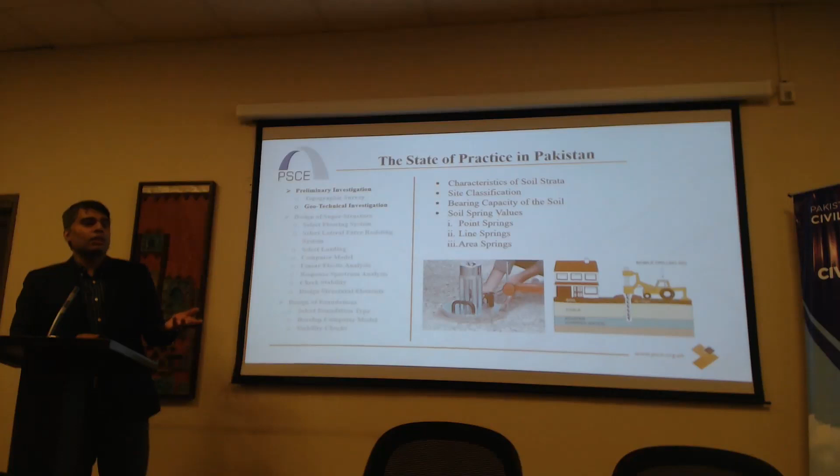Now, it's not as simple as that, because sometimes the geotechnical investigation informs you about the site in a certain way that you might end up saving money by adding a basement, right? Because if your soil is weak, you might spend a lot of money going for the piles, but if you add an additional basement, that will result in additional covered area for the owner, and it will save a lot of cost in terms of piles. So this step seems primarily done to select the type of foundation, but it is not as simple as that.

So after you're done with the geotechnical investigation and the topographic survey, the way I think about it is, we know about the space utility plan of the building from the architect, right? And so we know about the spans, we know about the typical live loading and dead loading and everything. So we tend to think about the flooring system that we will adopt for design of the building. After that, the next step is you start to think about your lateral force resisting system. And Rizwan sir, please correct me if I'm missing a step here.

There are a number of options given in the UBC code, right? So you have this building frame system, then there is a bearing wall system, then there is shear wall, then there are dual systems. And so a typical structural engineer would pick one of the lateral force resisting systems. Now, the consideration here is, you would like to pick a lateral force resisting system that is the most economical, number one, and number two, that is permissible by the code, right? Not all permutations and combinations of the lateral force resisting systems are permissible.

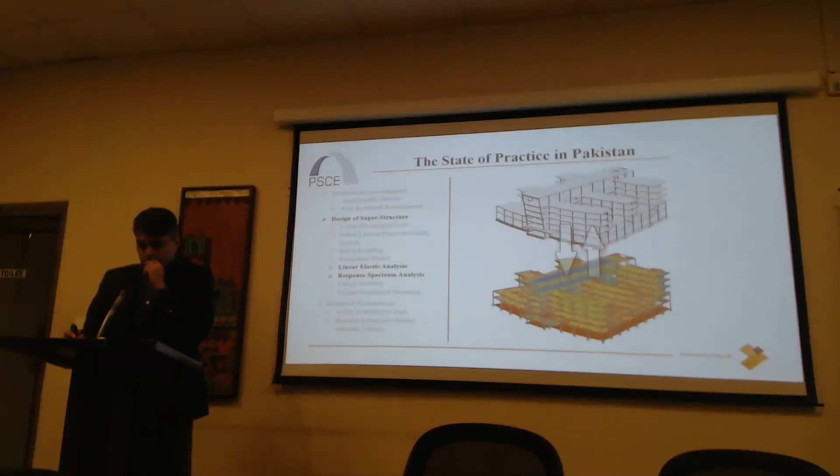And then you undertake linear elastic analysis of the computer model. Now imagine, this is very popular. This whole scheme of things is very popular in Pakistan. The reason being, a kid can get out of a school, have zero experience, and follow this cookbook and design a structure, right? Things seem to be very easy. So it's the method of choice in Pakistan.

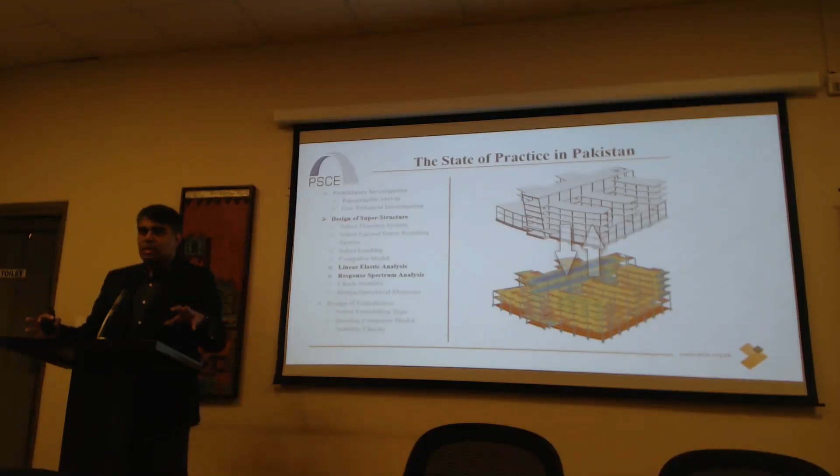You don't have to have any specialized knowledge of structural engineering, or you don't have to have any understanding of seismic hazard risk of various regions. And you just follow the scheme and you get it done. Then I missed something, the stability checks, which basically is you would check whether you have a failure in one of the columns or not, something like that, and then you design all of your members. Right?

So after you're done with the design of the superstructure, you have the geotechnical information, and typically, a structural engineer would know before he starts whether he would go for a raft or a spread footing or an isolated footing. But this design of foundations typically comes later, after you've designed the superstructure. And I might be wrong, so please feel free to correct me. But this is the practice that typically is undertaken in Pakistan, right?

And then you develop a computer model in SAFE, right? That computer model is not connected to the superstructure. So what you do is, ETABS allows you to export all of your forces at the base level, bring it to another software called SAFE. You apply those forces to the SAFE model, and then the deformations are never transferred back to the superstructure. Have you ever thought about it? Because we have been following this practice.

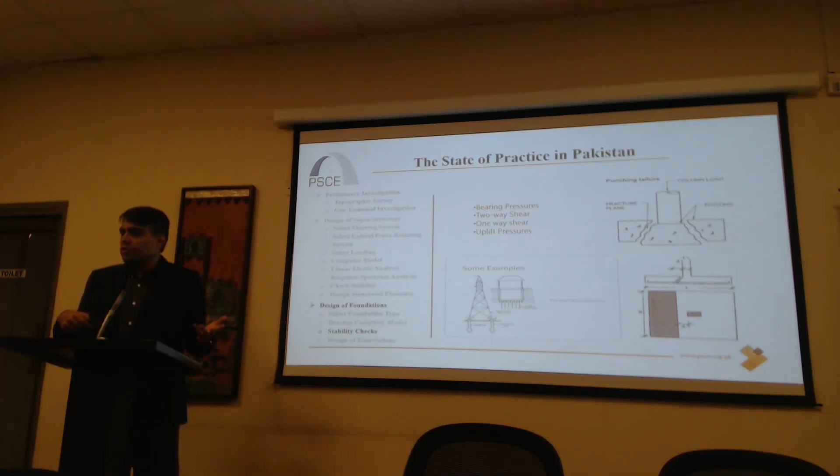And then there are stability checks. You see whether there's a punching shear failure or not, whether you need to thicken the pads or not, and then you would design the foundations. So as the performance-based literature would say, this is a perfect cookbook. Here are a few pointers that I would like you to think about. You are designing for reinforcement, right?

But up to this point, whether you have designed the superstructure or the foundations, did you ever consider stiffness of a column, for example, with 4% axial flexure reinforcement as compared to stiffness of a column with 1% axial flexure reinforcement? No, right? It's very conveniently estimated as BH cube over 12 multiplied by the cracked stiffness modifier that is given in the building code of Pakistan.

And when I thought about it, I was amazed. You know, here we are, the core purposes of any concrete structural design are two: to proportion the size of the elements and to decide about the reinforcement within the elements. The reinforcement is one of the most fundamental parameters of reinforced concrete structures, but yet we never account for those reinforcements when we are proportioning stiffnesses in our finite element model.

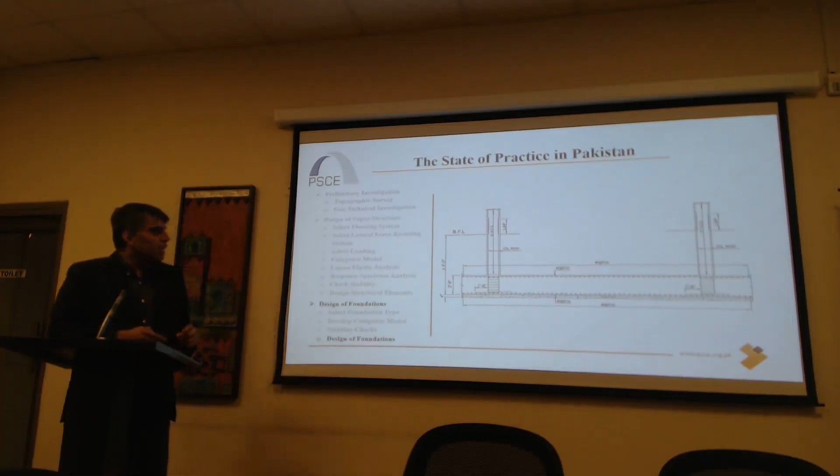It's amazing, right? Anyways, so here we are done, we get the project done, and we just push it, and we get the money, and that's the state of the practice in Pakistan. Very popular. All you need to do is know how to construct the response spectrum. You need to know which button to press in ETABS. Anybody can do it.

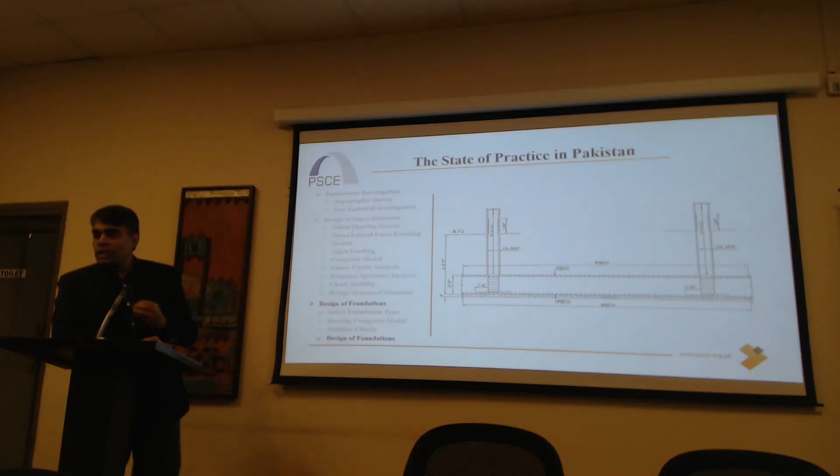So let me now take you on a very small journey. We'll start off with some preliminary theory, and then I'll take you very abruptly into the practice, but very briefly, because I don't have the time, right? These kinds of things would require you to have lectures, right? So I'll go through it very briefly, and my intention is to give you a flavor of things, right? So let me start off with theory first.

We have heard about the moment magnitude, right? There is a Richter magnitude, then there is moment magnitude. Just to give you an idea of the relative size of events. When we hear about magnitude 6, magnitude 5 is probably the threshold which starts causing damage to the buildings. Below magnitude 5, we are not interested as engineers, because that doesn't result in much damage to the building.

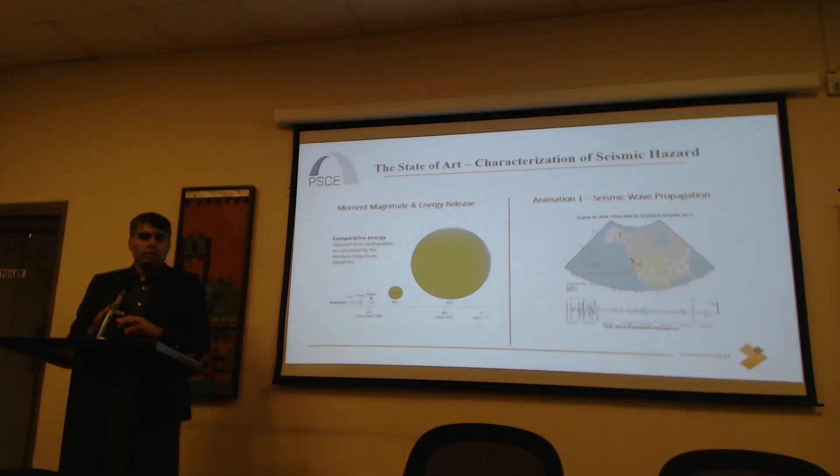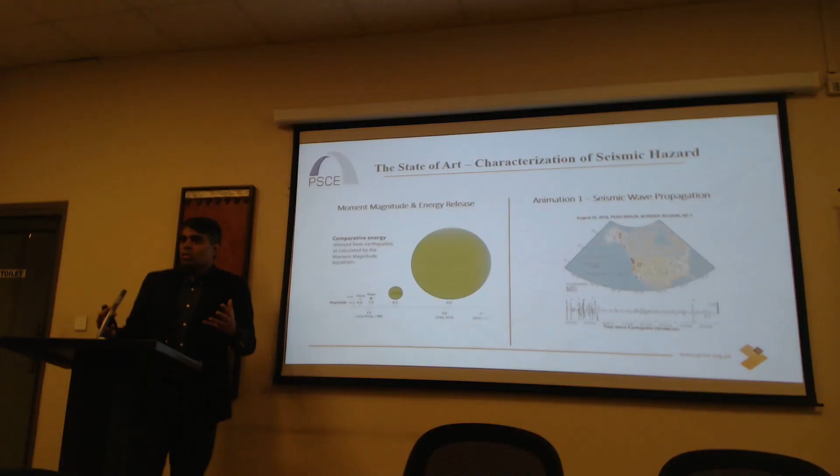Magnitude 6, magnitude 7, magnitude 8, magnitude 9. There's a huge difference between the amounts. And by the way, all of these circles represent the amount of energy released. So don't be deceived by the difference between magnitude 7 and 8. It might seem as if the difference is linear between 6 and 7 and 7 and 8, but no. The amount of energy that is released in such events is not linearly varying, to say the least, right?

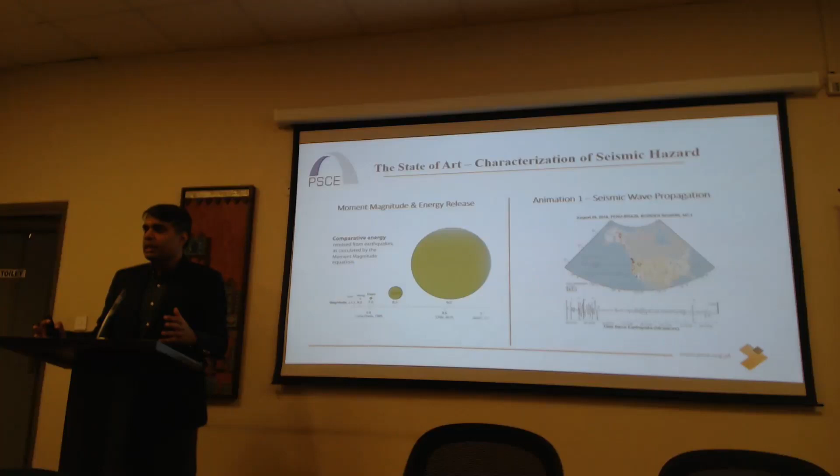Number one. Number two is many countries in the world, many countries in the West, including the US, what they have done is they have installed an array of seismometers. And I'll just show you the animation of one of the events that was recorded by the array of these seismometers. So this is an event that occurred at the Peru-Brazil border region, and you can see the waves passing through. And this accelerogram is, by the way, recorded at this station.

All right. So you can see the waves passing through the Earth crust as one of those events unfolded, right? Now, I want you to keep this set of array, this array of seismometers in mind for further discussion.

So what they did in the US, especially in California, was they said, okay, we have these hundreds of seismometers installed, and we have hundreds of events that have unfolded since, let's say, 1950s, 1960s. So they had recordings of the hundreds of events since 1960s. So, okay, wait a minute. Can we do something about predicting the intensity of the ground motion measure? And I didn't use PGA. I intentionally used intensity ground motion measure.

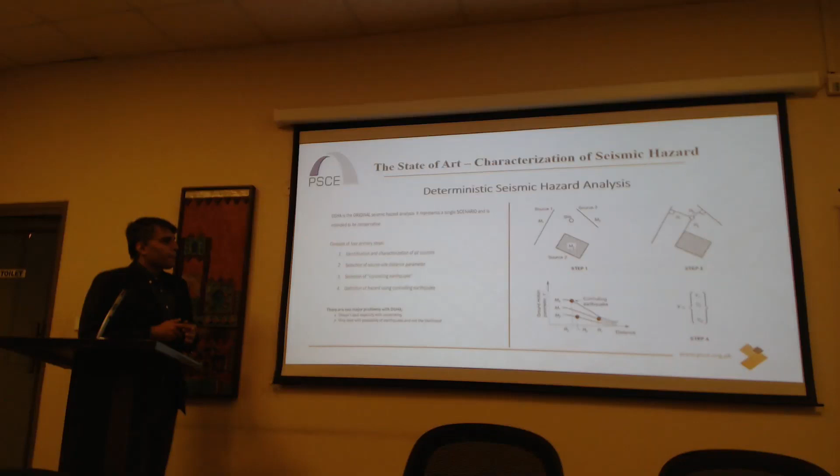So how are these attenuation functions then useful? Well, now I'll not go into the probability theory, but what they did was, they said, okay, now we have an idea of how our peak ground parameter of interest varies as a function of distance, right? So how about if we want to calculate the probability of exceedance of that parameter of interest, and I'll use PGA because PGA is mostly used, then how can we do that? By the way, let me take you back to this slide because it's really important.

What this slide tells me is that if I have a distance from the site equal to this value, then there is a mean that exists for a certain PGA value or ground parameter of interest, right? What this means is there's a 50% probability that my parameter of interest will be exceeded above this value if I use this value, right? Because I am at the mean. So 50% is too much, by the way. That means there is a 50-50 chance that if I use this value of acceleration, it will be exceeded.

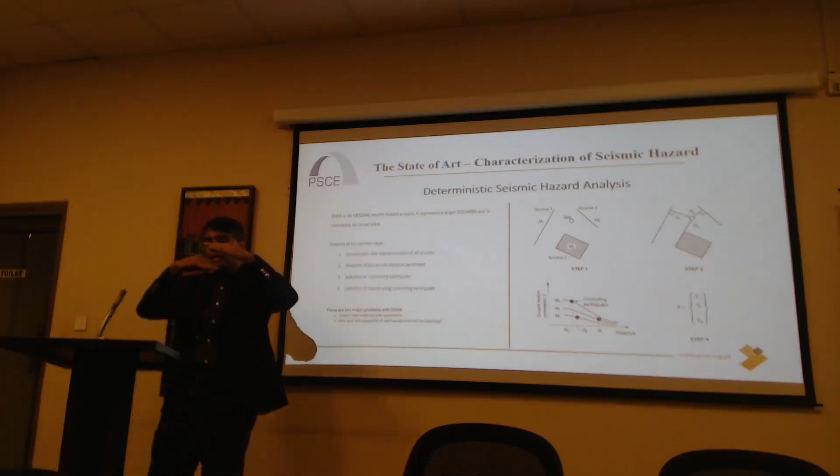There can be line seismic sources. These are fault lines that we have. And there can be area seismic sources. These are the regions which we don't understand. So subduction zones, for example, when one plate is moving under the other plate, we don't know whether the earthquake will be generated due to rupture at this location, or because the plate is dipping at an angle, or X kilometers away from this location. So those are examples of area sources. So we can have all sorts of sources, right?

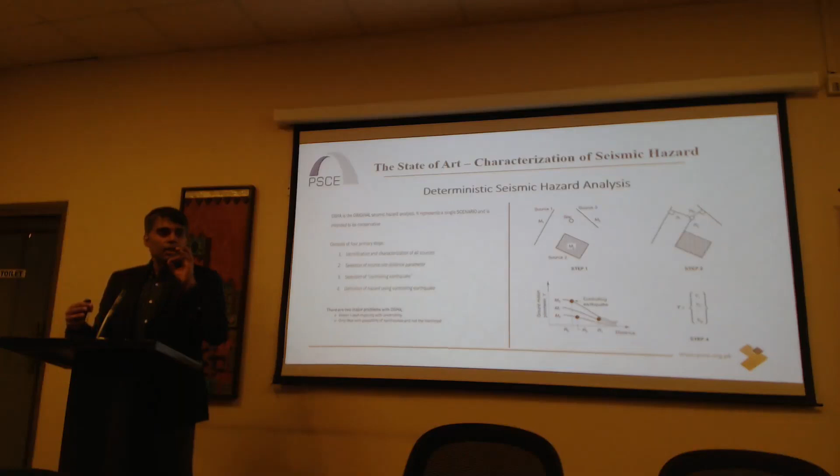Now, if we have identified and characterized all of the sources, the next step is what magnitude of earthquake to expect from each source. We go to geological catalogs and we find out that each source cannot generate an earthquake greater than a certain magnitude. So with that information, we can say that we have completely characterized the source. And by the way, this is very simplistic; there will be depth, there will be hypocenter, a lot of discussion that I am skipping right now.

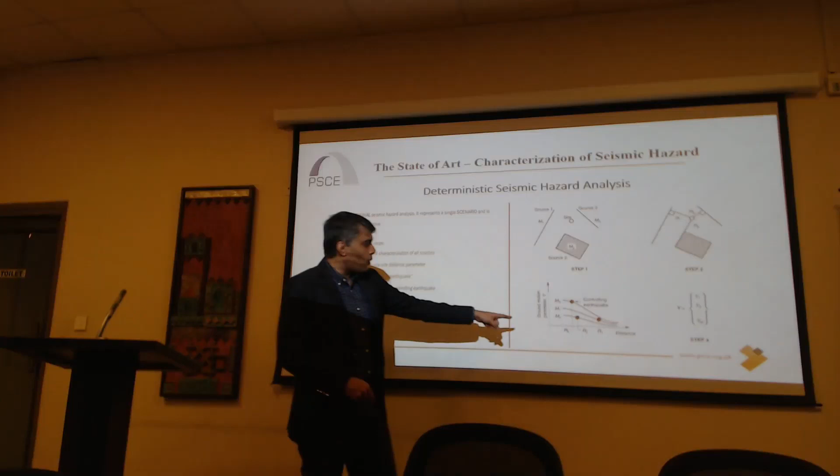Once I have done that, the next step is to find out the shortest distance between the source and my project site. Remember this little thing that we developed? I have a probability. I can say that my probability of a PGA value exceeding due to my first source, second source and third source can be plotted like that, right? Because the distance of my site from all of those sources is different, R1 corresponds to this source, R2 corresponds to that source, R3 corresponds to this source, right?

And then all of a sudden I'll identify that my controlling earthquake comes from my third source, which is this guy over here, right? And not from this source and that source. Very simple. So with that information, I will know my threat at a particular site completely. I've quantified it. This process is called deterministic seismic hazard analysis.

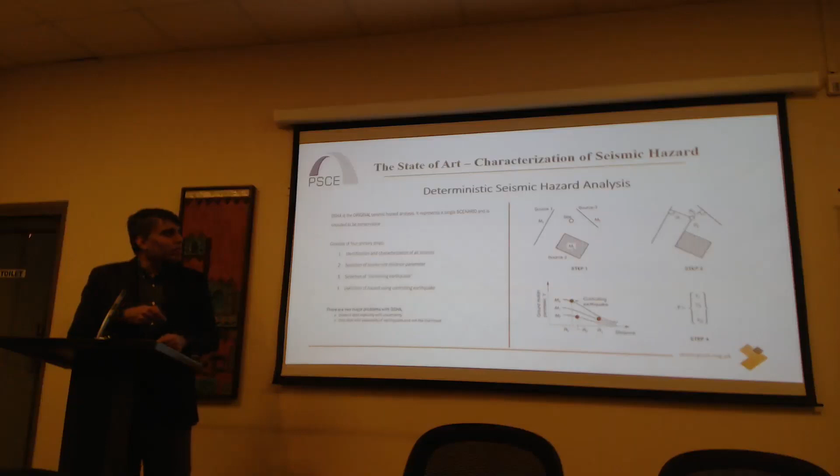Now, it seems very simple. It is very simple. This type of approach was used to characterize seismic hazard for decades, until they started to realize that we are only considering the worst possible scenario. What do I mean by that? Remember, we only considered the shortest distance from the source to the site. The earthquake will not always occur here. The earthquake can occur here, or over here. The hypocenter can be situated here, or for this area source, anywhere inside the rectangular region, right? So I am considering the worst possible scenario here.

So first of all, it does not explicitly deal with uncertainty. I have just said that this source can generate an earthquake of magnitude X, and I have considered the maximum value. What is the probability of that source generating a lesser magnitude earthquake? I have not answered that question. Similarly, I have only considered the shortest distance, right? So this is what they mean: I have considered the worst possible possibility, but I have not considered the likelihood. This is very significant.

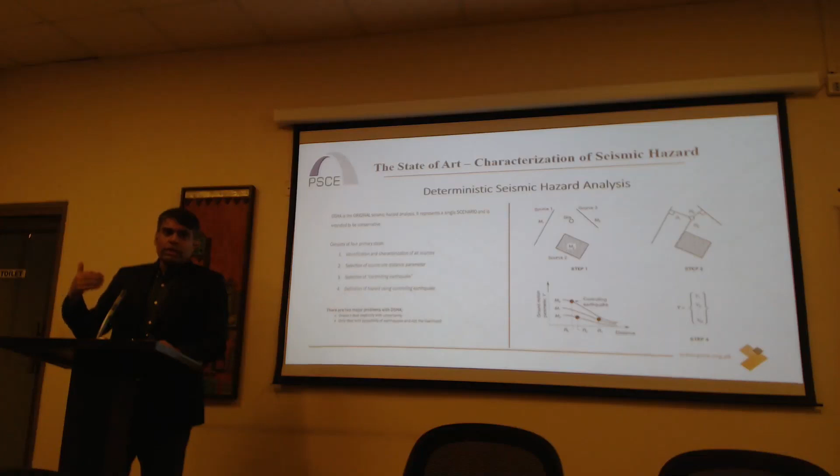For example, there are regions in the world, and I'm sure Lahore is one of them, where significant earthquakes occur with a return period that is considerably longer as compared to earthquakes that occur in Islamabad. There, significant earthquakes occur at a shorter return period. So what does that mean? If I'm constructing a building in Lahore, would I construct it like I am constructing it in Islamabad?

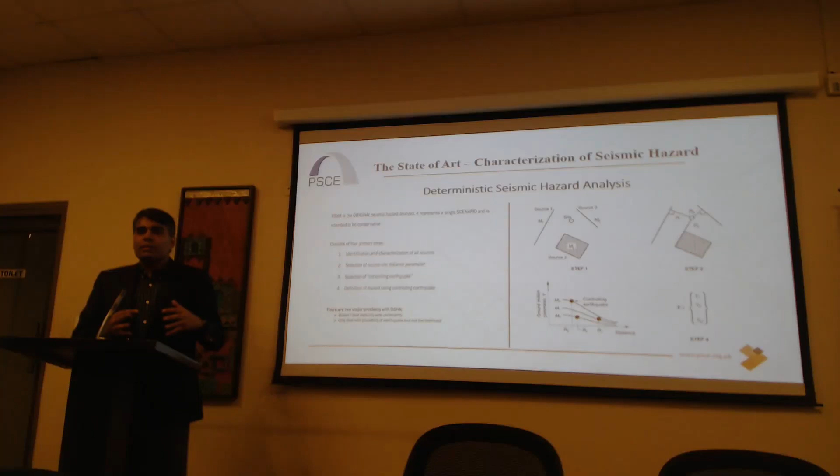Everybody knows that significant events are much more likely to happen in Islamabad than in Lahore. But because I was using this approach, where I was using the worst possible scenario, my building in Lahore will be as reinforced as my building in Islamabad, and that is wrong. That is where they realized that this approach has some drawbacks. So what did they do?

This technique was pioneered by, amongst others, Allin Cornell of Stanford. In the 1970s, they started to say, let's consider all of the variability, right? The first question is, where will the earthquake occur? As I said, it can occur anywhere along the fault lines or within the area source. So the first question is, where will the earthquake occur? How big will the earthquake be?

And even if we know where the earthquake will occur and what the magnitude of the earthquake is, what will be the intensity of the ground motion due to that event at my site location? And last but not least, when will my earthquake occur? These 4 types of uncertainties completely characterize my problem. And so they started to ask this.

This is just a slide, and I'll skip this because I've already explained what a point source is. Your point sources are volcanoes, one example, right? There are other point sources. And then there are line sources, and then there are area sources. We've already discussed this. So very quickly, what they did was they said, okay, let's develop probability distribution functions for each one of those types, right?

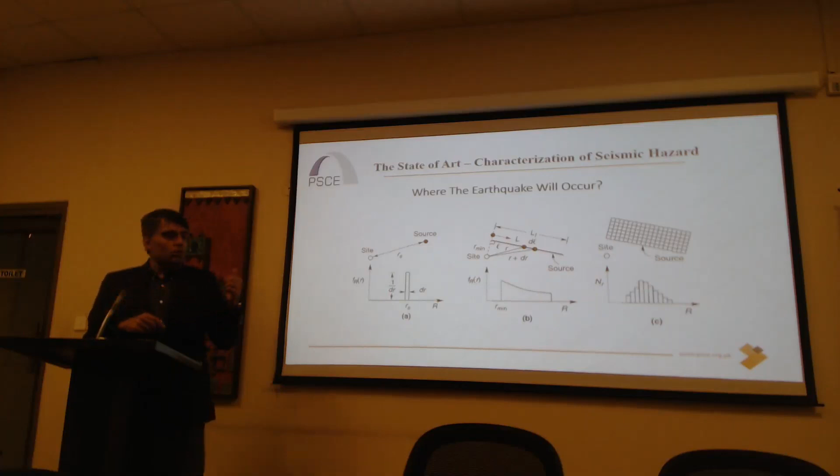A probability distribution function is basically such that when you add the area under it, you should get 1. And if you look at the probability distribution function, it will give you the probability of a certain ordinate as a function of the abscissa, right? I assume that everybody is aware of PDFs. So for a point source, the probability that the event will occur at the source is 1. So the ordinate multiplied by the abscissa should be equal to 1, right?

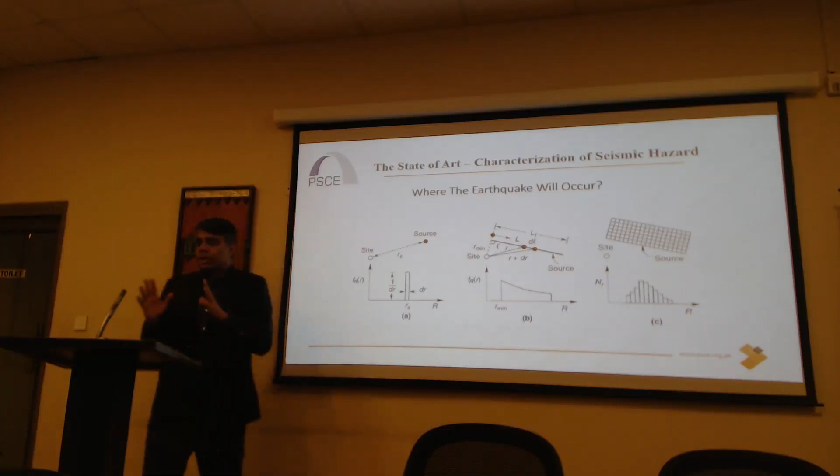For a line source, they said, okay, we don't know much about faults. They can rupture at any location. So let's assume that the hypocenter of the event would be at one of those locations with equal probability. So there is equal probability that the event will be triggered here, here, here, or there, right? And therefore, the PDF is very simple.

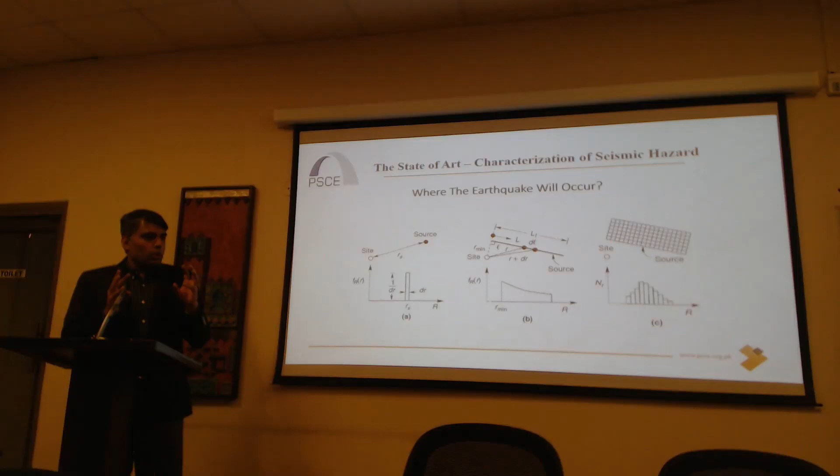From here to here, from R to R min, there is no probability of the event occurring. And then from here to there, you distribute this line into equal lengths, and basically you develop this PDF, because the probability of the event occurring at any of those locations is equal, right? So basically, I take it for granted that you can construct this.

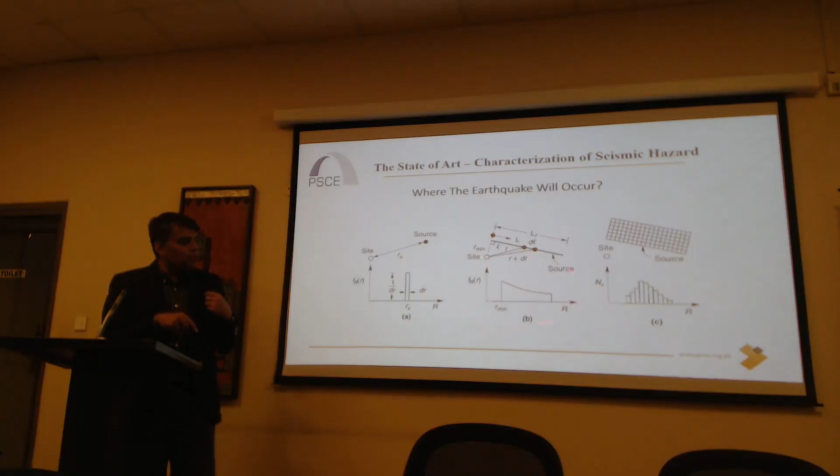And similarly for area, we divide the area into grids, and we assume that within those grids there is an equal probability of the hypocenter existing. Okay. So this is the PDF of area sources, this is the PDF of line sources, and this is the PDF of point sources. The next question is how big the earthquake will be. And here we had help from a number of geologists. There are a number of approaches, and there are types of faults.

There are faults that exhibit a characteristic slip rate, and that makes our life easier. For example, this was developed by someone, and I've forgotten to put the name here. By the way, I need to issue a disclaimer, because all of this was taken from a textbook, Kramer, and I should have given you all of the references, right? I will give the references. I hope you guys will post it later on.

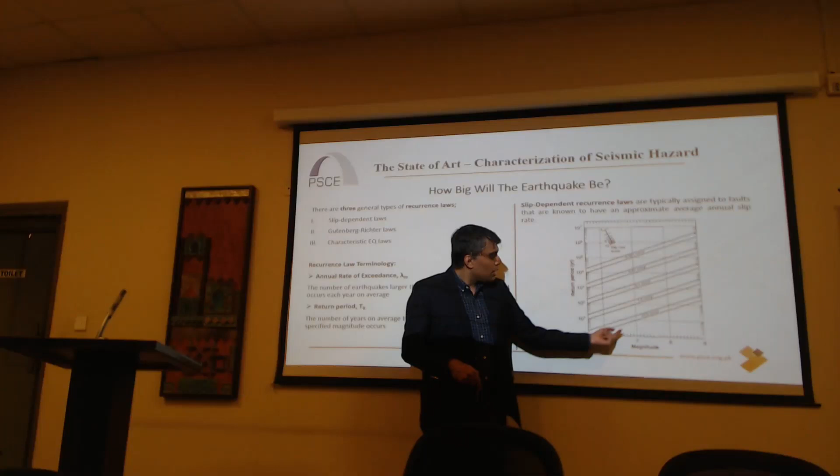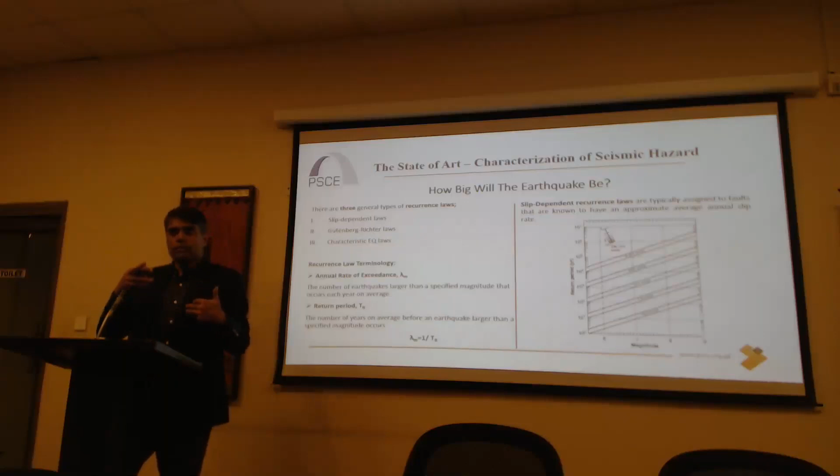So basically this was developed as a means to evaluate the probability as a function of magnitude. So if the slip rate is 10 centimeters per year, right, then I can use this band, and I can basically say that my probability that my magnitude 7 will occur is 10, right? And 10 is basically the return period. I hope you guys are very familiar with the return period. Return period is the duration after which, on average, we expect the event to reoccur. Okay?

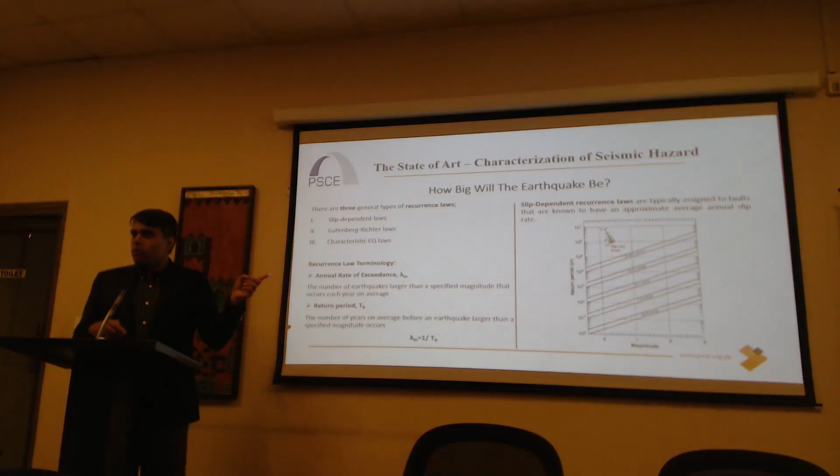Are we okay? Okay. So we can have all those different types of slip rates, and if there is a slip rate that exists somewhere in between, we will interpolate and we will get the return period for a certain magnitude of earthquake. This type of relationship is very popular for strike slip faults, right? Strike slip faults are faults that basically slide past each other.

And then this is very big. Now there is another way to characterize the magnitude versus the probability. By the way, lambda m is the mean annual rate of exceedance. This is 1 over t, 1 over the return period, right?

What they found out was, from any particular fault, if they have a recording for example 80 years, and if they add up magnitude, if they calculate the number of events greater than 6, they'll get a certain number. Then if they add up all events with magnitude greater than 7, they get another number. And if they continue for all magnitudes, they can basically fit a line through it.

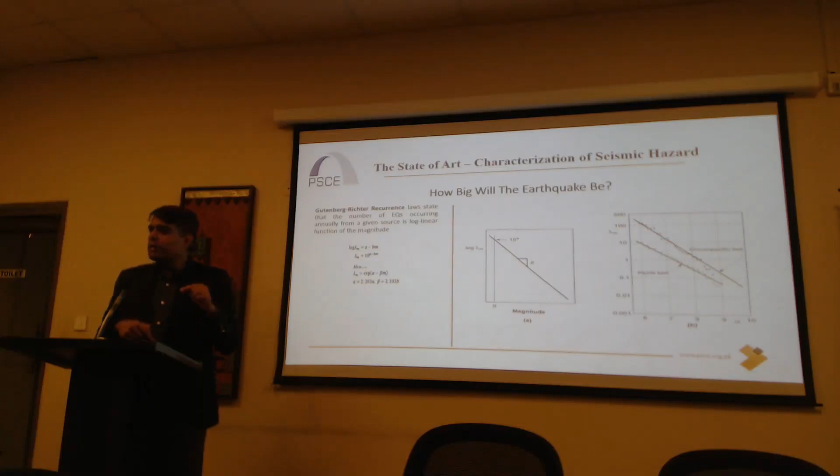This type of relationship is called the Gutenberg-Richter Recurrence Law. And this is basically fundamentally used for all types of faults in the world. And then there are certain variants.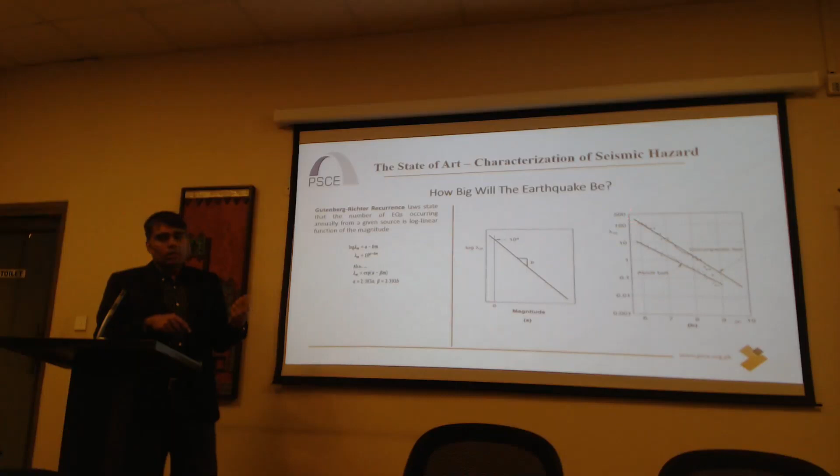Then they realized that this line is basically linear, but there is no data beyond this point, so they had to taper it off. Basically what they're saying is you cannot have a magnitude 1 event greater than 1,000 or 10,000 events. So they introduced later modifications where they tapered this off.

And if you look at this curve, it goes beyond magnitude 10. What they found out is typically faults cannot generate more than a certain magnitude, and this is what they have acknowledged here. So this is called the modified Gutenberg-Richter law.

So now I have introduced to you two tools. One, we have addressed spatial uncertainty. Remember this slide? I have very briefly addressed how to address spatial uncertainty, and we have also addressed how big the earthquake will be using Gutenberg-Richter or modified Gutenberg-Richter.

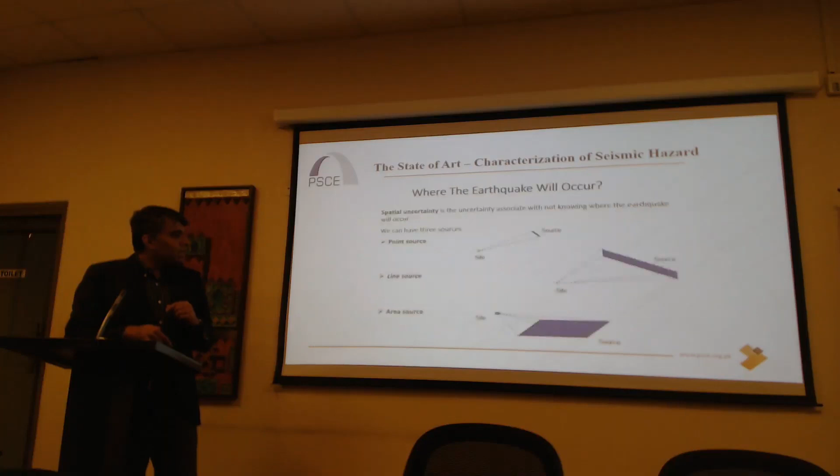The next thing is the intensity of ground motion. I have already introduced the attenuation functions for you guys. So we have all of the probabilities individually worked out, but we have not been able to integrate all of the individual probabilities, and I'll show you how we can do that.

Before I go into this, and this is the magic of it, we use a theorem of mathematics to stitch all of the individual probabilities. And that theorem is called the total probability theorem.

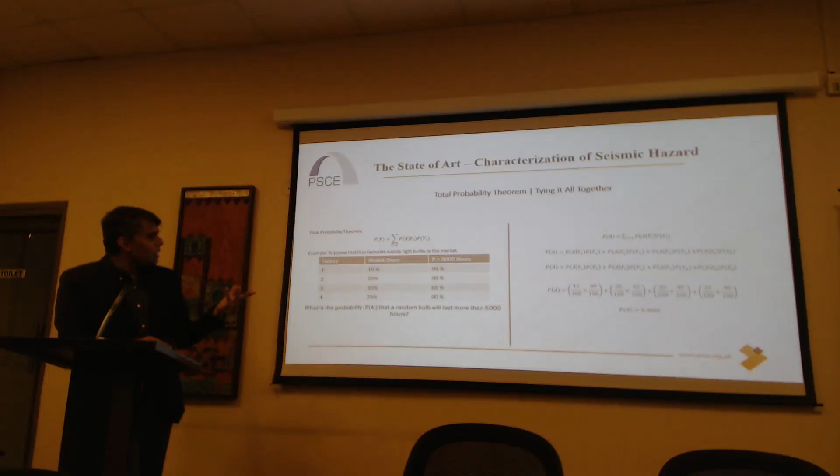Imagine if you have a factory, and the factory produces... imagine you have 4 factories producing light bulbs. Factory 1 produces light bulbs and its market share is 15%, and the probability that its light bulbs will continue to work after 5,000 hours is 99%. Then we have factory 2, which has a market share of 25%, and the probability that its light bulb will continue to work after 5,000 hours is 95%. And similarly, we have factory number 3 and factory number 4.

Now imagine that all of these light bulbs are sold out in the shops, and you have no way to figure out which one belongs to which factory. The problem is you need to figure out that if you go out in the market and buy one of those bulbs randomly, what is your probability that the bulb you have bought will last greater than 5,000 hours?

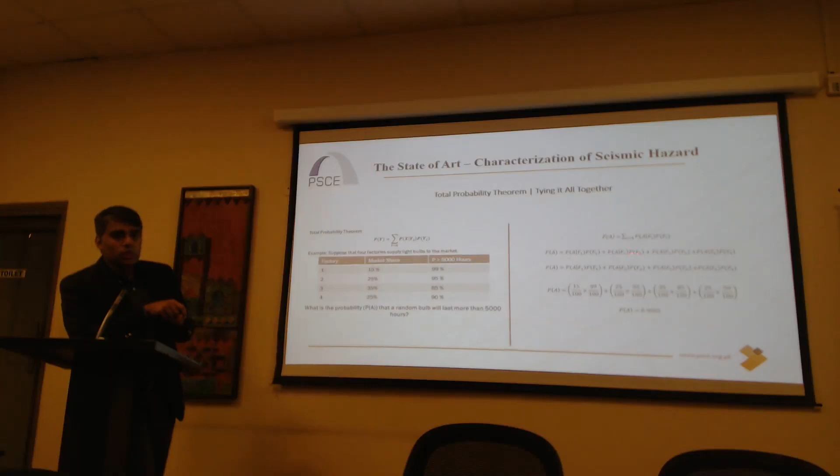Right? And what basically the total probability theorem tells you is that the probability that you'll get a bulb from factory 1 multiplied by the probability that bulb will last more than 5,000 hours, plus the probability that you will get a bulb from factory 2 multiplied by the probability that bulb will last more than 5,000 hours, and there are 2 other terms. If you multiply these and add all of them up, you get the probability that your randomly chosen bulb from the market will last more than 5,000 hours.

This theorem is called the total probability theorem. And we use this theorem to calculate the probability that our probability of exceedance of a certain PGA value is X.

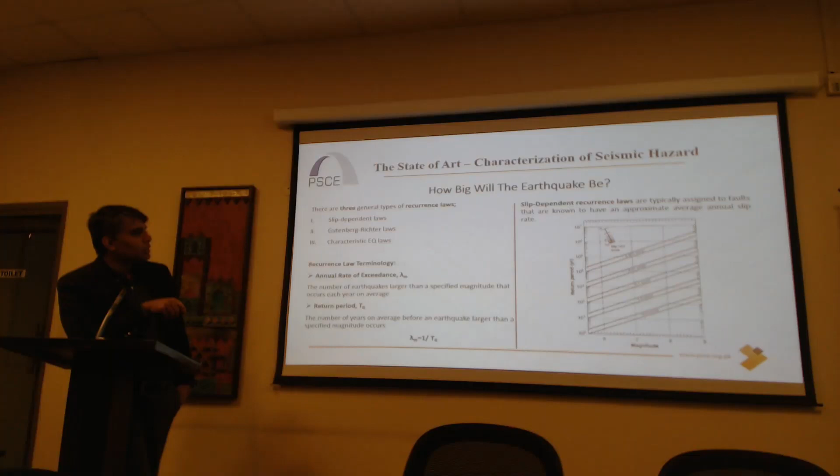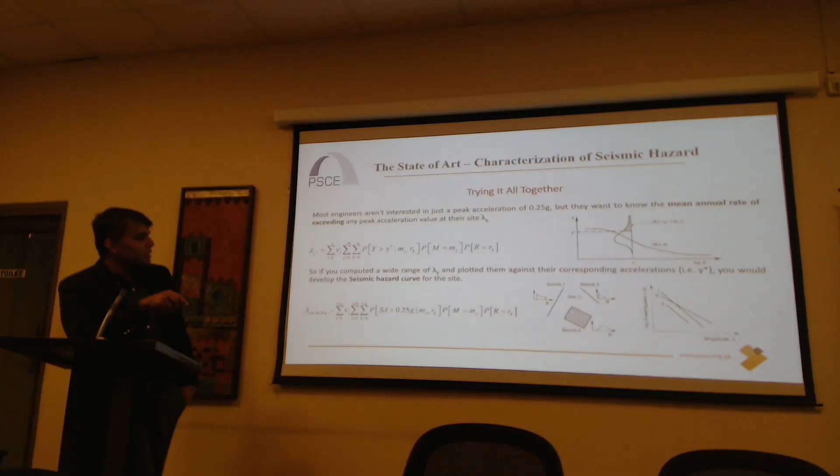Okay, so if you multiply this with this and then the distance from the fault, and sum up all of this for one source, and then again sum up for all of the sources - I've skipped a lot of mathematics here, but I need to do this to move forward. So at the end of the day, you get a number for each of these peak ground acceleration values.

My ground motion of choice is PGA here. As my peak ground acceleration increases - this is, by the way, peak ground accelerations for Islamabad. Yes, Islamabad. They have worked it out for Islamabad. So this is real, guys.

There are multiple sources, as you can see - the Jhelum fault, the main boundary thrust, the main mantle thrust, the Panjal fault, and the Riasi thrust. There are multiple fault lines around Islamabad. So they figured it out for each one of those sources - source 1, source 2, source 3, source 4 - and then added up to get this solid line, which is our probability that a certain magnitude of PGA is exceeded.

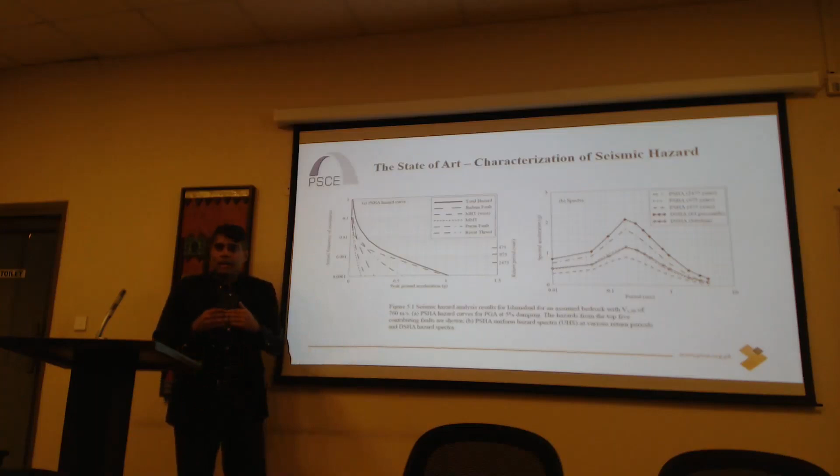What I can tell you is there is absolutely no probability, perhaps a little bit of probability that my PGA will be exceeded by a magnitude of 1. This is PGA, by the way, not spectral acceleration that I'm talking about. But my probability that my PGA will be exceeded above 0.5 is approximately 0.001, or 0.1%.

So these curves are known as hazard curves, right? These curves are known as hazard curves. Basically, what hazard curves give you is the probability of exceedance of a certain ground motion measure - PGA in this case. We then use these hazard curves to develop uniform hazard spectra.

Now, what are the uniform hazard spectra? Do we like to take a break? Okay, 10 minutes. But let me finish this.

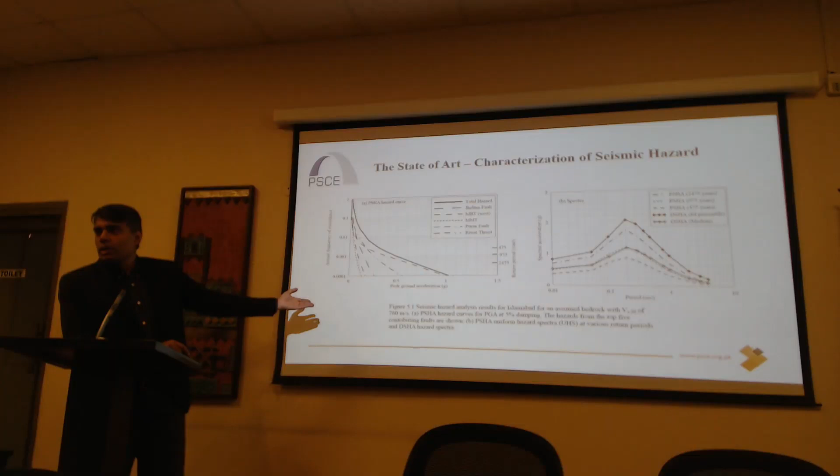Remember, guys, we were working with PGAs, peak ground acceleration - no interest to a structural engineer. Even if I have this information, what good is that for you if you're designing a building, right?

But I am interested, on the other hand, if I can develop the same sort of relationship for a single degree of freedom structure as a function of distance. I can develop my attenuation functions and then use those to generate these kinds of curves where I have spectral acceleration. Now, this is a 5% damped single degree of freedom system.

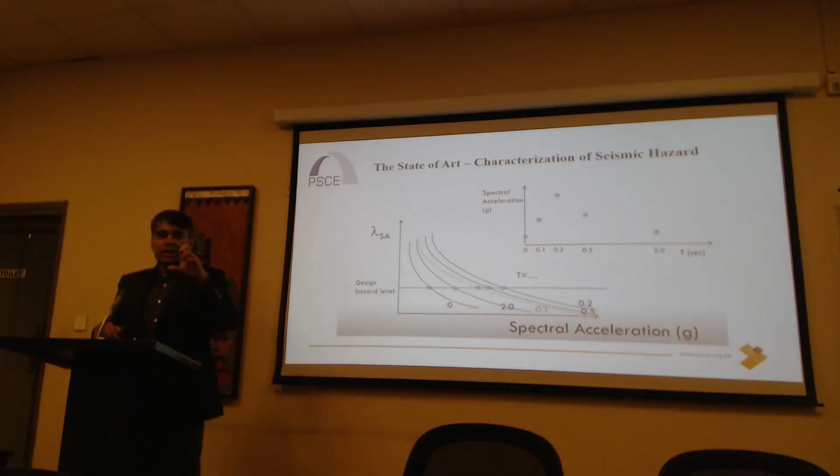On the x-axis, and along the y-axis, I have mean probability of exceedance. Now there are other variables involved. This is the PGA curve, when my time period is equal to 0. But then I have 2 second, 0.1 second, 0.5 second, 0.2 second curves - this is my time period of the single degree of freedom oscillator.

So I have a whole range of those curves. What I can do is select a hazard of my choice, select a level of acceptance of probability of my choice, draw a single line through it, and what I get is for a time period of 0, I have a certain probability of a certain spectral value - this is that.

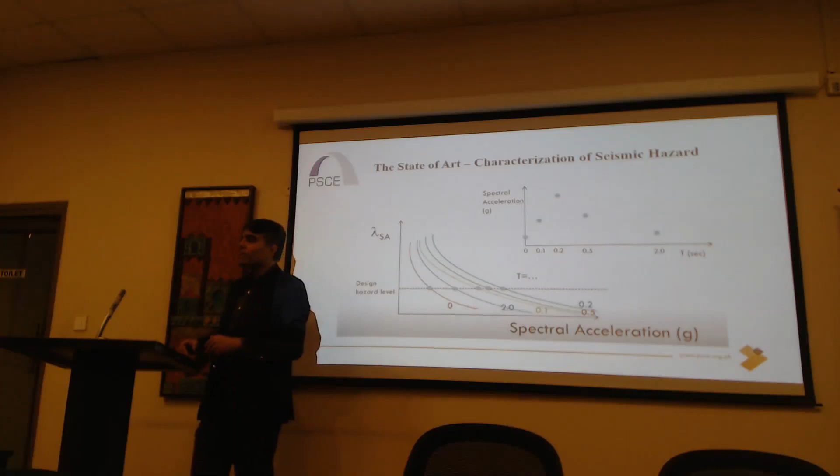Then for 2 seconds, I have another spectral value - this is that. Then for 0.1 second, 0.5 second, 0.2 second, I have all of those spectral values, and I can then develop what is known as a uniform hazard curve. What is a uniform hazard curve? A uniform hazard curve is a plot of spectral acceleration that has a uniform probability of exceedance.

Do you understand what I'm saying? Any uniform probability of exceedance - I can select 1% probability of exceedance, I'll have one set of those. I can say 2% probability of exceedance, there will be another set of those, but of lower magnitude.

Most of the hard work done, guys. Now, after we come back from the break, I'll take you from this theoretical background to the latest codes as to what they're saying, because since 2010, since ASCE 7-10, they have shifted the design of the building. There has been a paradigm shift in the philosophy of design. Previously, they did not follow the performance-based approach when writing the codes, but now they do, since ASCE 7-10, and that has resulted in a significant increase in seismic loads, as you'll see.

But in Pakistan, we are relying on a code that is more than 20 years old at this stage. So let's talk about that after we come back from the break.

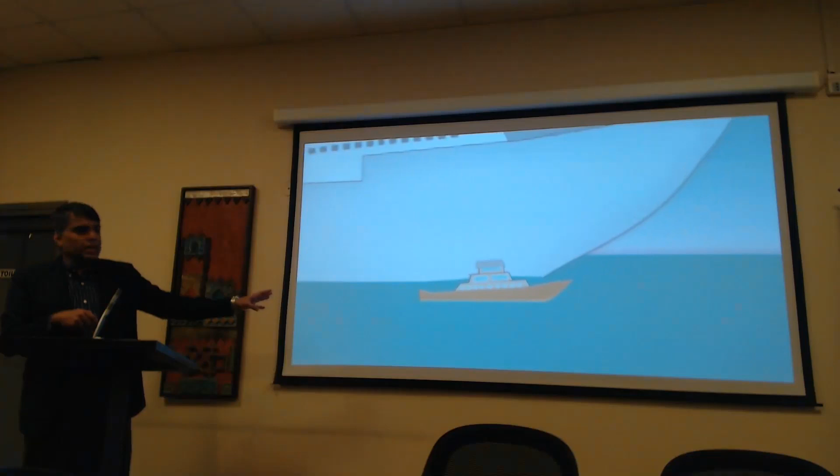Let me give you why we do this. I have a very interesting simulation. Imagine we have two ships, and those ships are subjected to waves, just like earthquakes. There's a smaller ship and a larger ship. The smaller ship will roll easily when the wavelength is smaller, but the larger ship will start rolling when the wavelength of the waves is much larger.

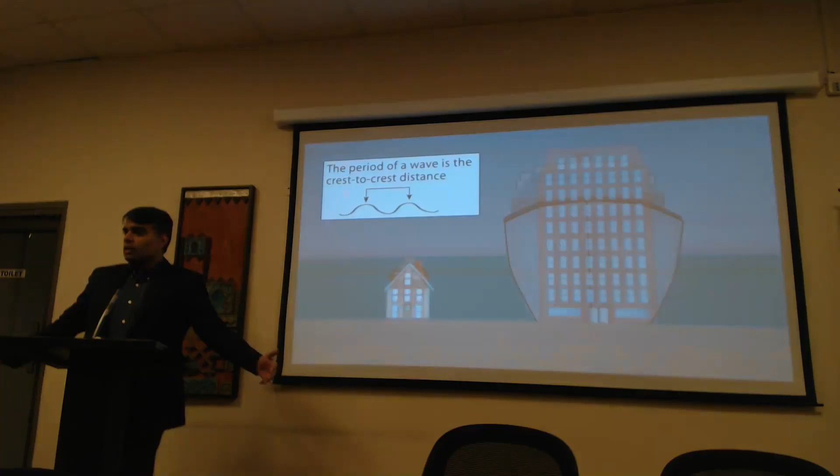The same is the case with buildings. If this is the bedrock level, and this is the alluvium, this building is short, so its time period is very small, but this building is long, so its time period is long. If this building is located on bedrock, bad news. If this building is located on bedrock, no worries. If this building is located on soft strata, as one of the Margalla towers was, bad news - because of the phenomena of resonance. This is how waves passing in the soil will affect those buildings. This wave will do nothing to this building.

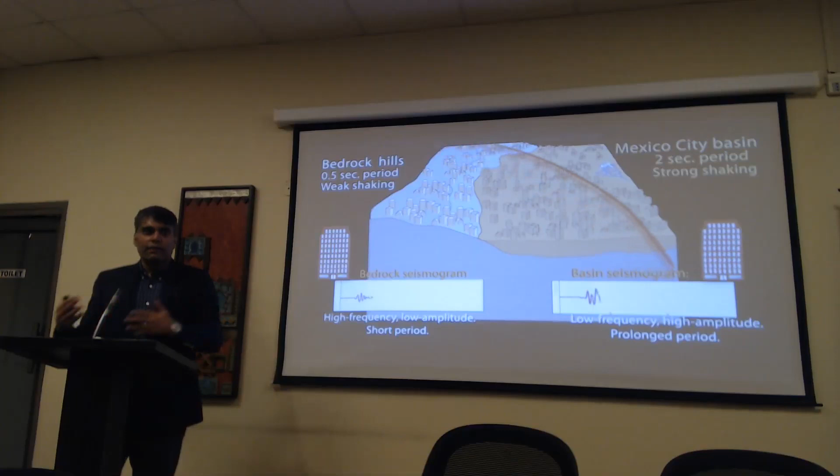So this is why you get those numbers, FA and FV. They are basically empirical coefficients to scale your bedrock accelerations. So this is that. FA and FV explained, understood?

Now, once I have my modified spectral accelerations at 0.2 second and 1 second, I have to convert the two of them to my design spectral accelerations at 0.2 second and 1 second. How do I do that? Simply multiply it with, and I'll quote it, fudge factors, 2/3, 0.66.

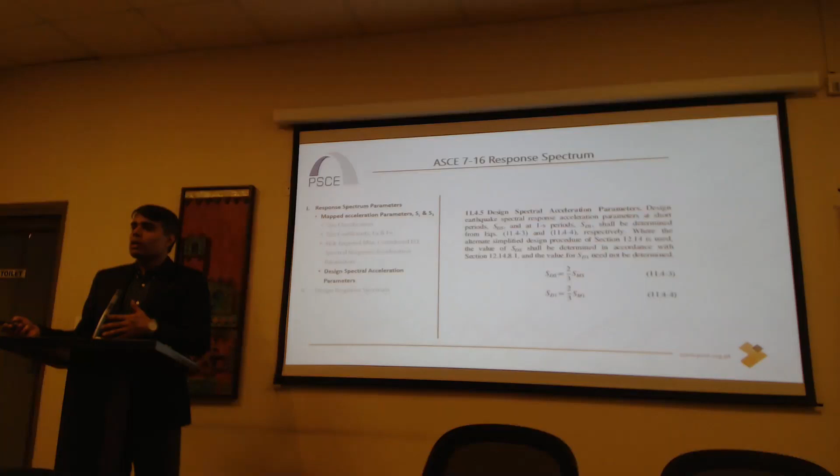There's no justification for that, and I don't want to go into the details as to how those 2/3 coefficients appeared in the code. It turned out that engineers in California were not happy about using these modified values of spectral accelerations directly. They thought that they were doing well. Then there was a sort of political settlement between one party and another, and they ended up including these fudge factors of 2/3.

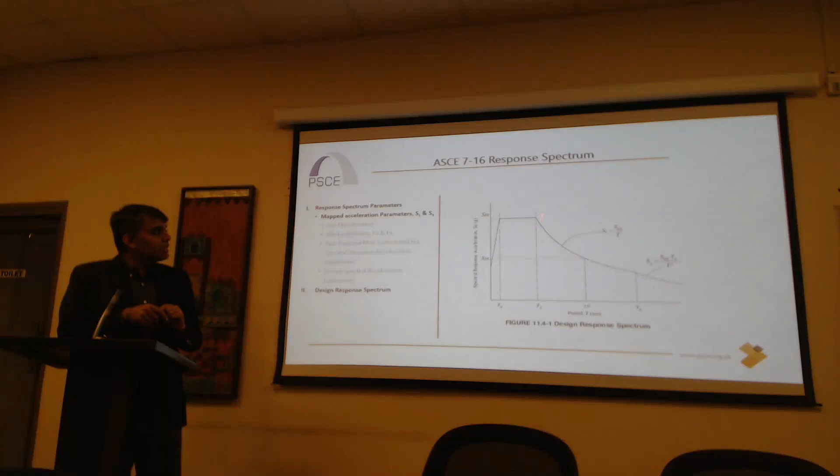So politics everywhere. Anyway, at the end of the day, you get this response spectrum from ASCE 7-16. This is different from UBC 97, and I'll compare the two. This is your TS, short term, and SDS - remember this SDS, how we got this SDS? And this is your 1 second, this is your SD1, and this is how things are tied up empirically, sort of, for a response spectrum.

Then, just like the UBC, there are tables for your acceptable types of lateral force resisting systems. Two significant changes. Number one, as per ASCE 7-16, if the height of your building is above 160 feet, you cannot use any type of shear wall alone. ASCE 7-16 forces you to use this shear wall system with an SMRF, not with an IMRF. Again, this was not there in UBC 97. In UBC 97, you can have a shear wall lateral force resisting system, whether bearing shear wall or building frame system, and just design the system.

So that's change number one. Change number two is, here they have introduced - and I'm sure there are other changes, I've just used it for a year or two - they have started to allow a new type of system, a dual system, in which you have special reinforced concrete shear walls with IMRF.

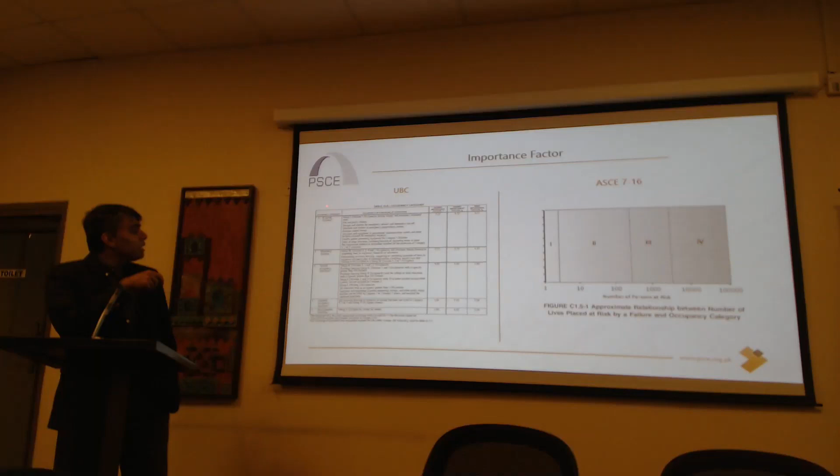So another important change: in UBC 97, the importance factor is based on the occupancy category primarily. In ASCE 7-16, they have moved past that. They don't care about why you are constructing a building, but what they care about is your number of persons at risk. Now, this is a more rational approach, right?

So basically, this number of persons at risk is not confined to the number of people who would lose their lives if the building collapses. It includes the number of people whose life will be adversely affected, even if they are not immediately injured or do not immediately lose their life due to collapse. Example is hospitals. If a hospital collapses, that is going to affect the lives of all of the patients that use that facility. So you count those numbers up. So this is a significant shift.

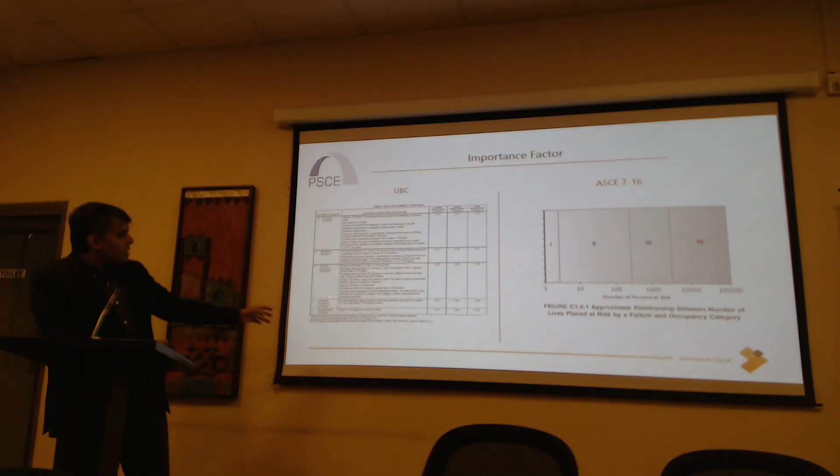Now, basically you pick the risk category from this chart, and then you pick the importance factor. For seismic load it's different, for wind load, ice and snow it's different. So this is 25% for risk category 3, and most of the tall buildings fall into this category. So here you have a 25% jump straight away in your base shear. Previously you used to use this for a standard occupancy structure, because we were focusing on why the building was being constructed rather than how many lives will be lost if it collapses. So things have moved on in 20 years.

All right. Then, most important: Pakistan Building Code uses 10% probability of exceedance in 50 years. I absolutely have no faith in Pakistan Building Code, frankly. But even if you adopt those spectral values, the response spectrum in Pakistan Building Code, there is a 10% probability that your ground motions will be exceeded in the next 50 years. But if you adopt ASCE 7-16, the probability of exceedance is only 2%.

All right. So this is where the world is. This is the international standard for acceptability of design parameters as far as seismic design is concerned. We are living 20 years back in time.

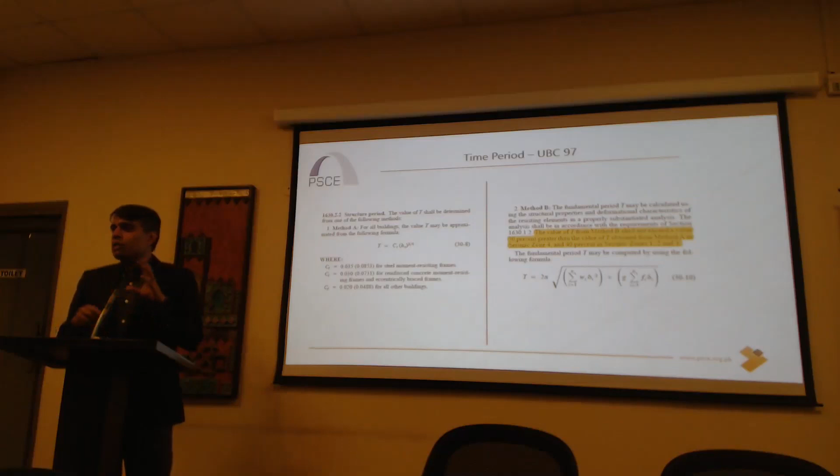Again, another significant change. In UBC 97, you use this to calculate the approximate time period. And if you want to go into details, nobody uses this, right? Everybody uses this formula, or the program calculated time period. ASCE 7-16 uses this as approximate time period, and then it puts a cap.

It says that this value of approximate time period cannot be exceeded by a magnitude. The fundamental time period shall not exceed the product of the coefficient for the upper limit on calculated period, CU, from Table 12.8-1, which is this guy over here, and the approximate fundamental time period TA determined in accordance with 12.8.2.1. So basically you use this, and then you resort to your finite element code.

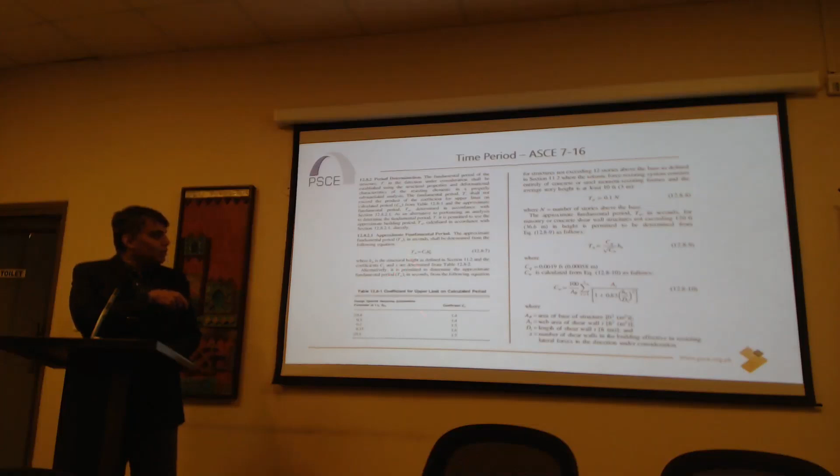Even if your finite element code is telling you that your fundamental time period is longer than this, it says you have to multiply this CU with this guy over here and then force your finite element program to not have a fundamental time period greater than this value, CU times TA. Why? Why does the code say that?

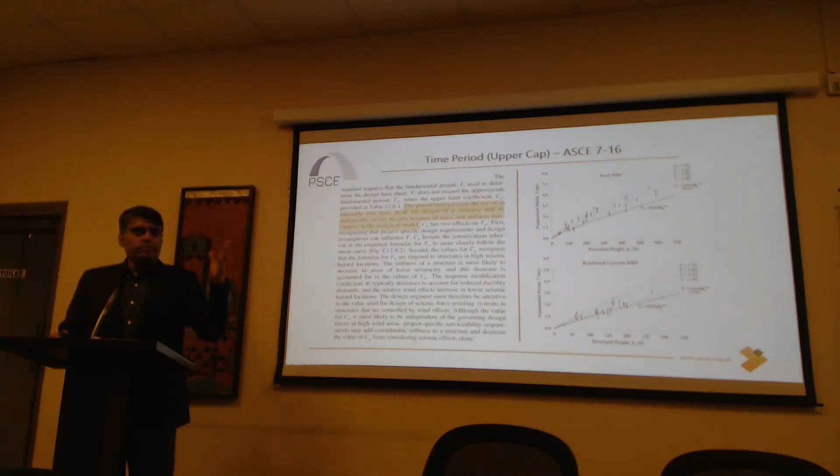Because what they have discovered is our formulation of the building structures is erroneously flexible as compared to the actual structures. And this is from a study of a number of buildings in earthquake zones. So in UBC 97, you can use any time period, but this guy over here basically limits the upper time period. What does that do indirectly? It ramps up your base shear. It disallows any decrease in your base shear.

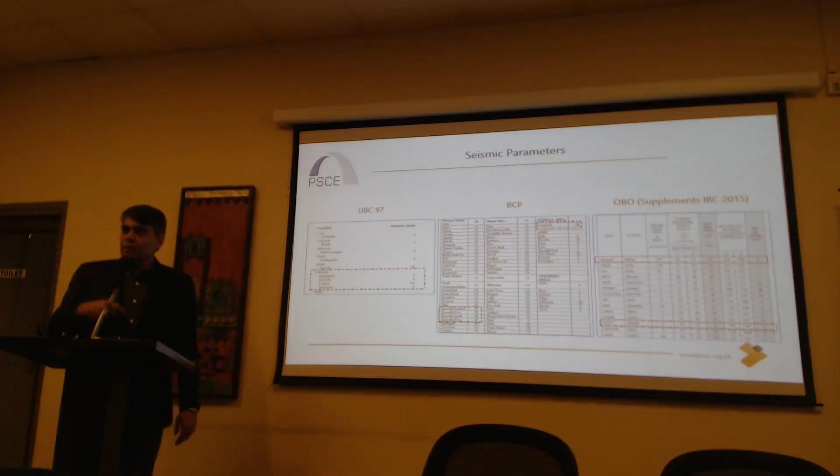So I'll skip this slide. Now, here are some important slides, and I'll compare these slides with the Indian slides also. And this slide makes me angry, because professionally, I think that they have done this deliberately. UBC 97, on which the Pakistan Building Code has been based: Islamabad Zone 4, Karachi Zone 4, Peshawar Zone 4, Lahore Zone 2A. Building Code of Pakistan: Islamabad Zone 2B, Karachi Zone 2B.

I mean, which one of the experts knew about probabilistic seismic hazard analysis or deterministic seismic hazard analysis? Who conducted these analyses in Pakistan? No one. Right? And yet they had this map that you see in front of you. And it actually makes me crazy.

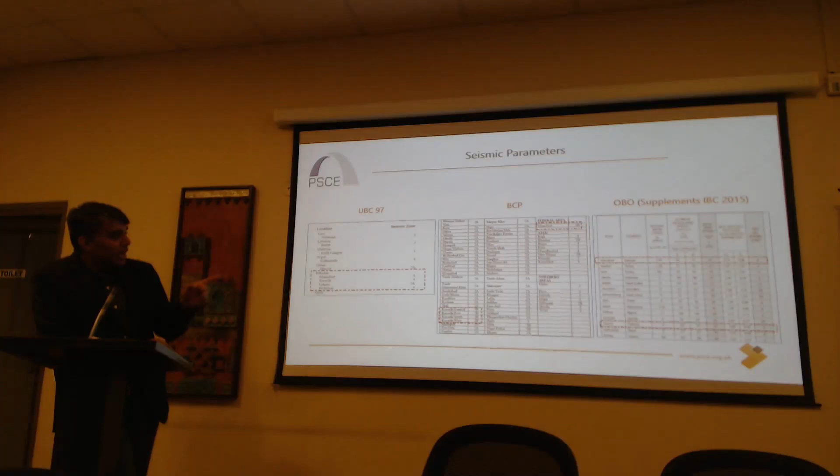So the OBO code, which is basically a supplement of the IBC 2015, resonates this view. It gives you the SS and S1 of Islamabad, Karachi, and it also gives you SS and S1 of Lahore, which is very different from the Pakistan Building Code. I don't have that over there, but as a last resort, let's compare our codes with the Indian codes. And I did this very quickly last night.

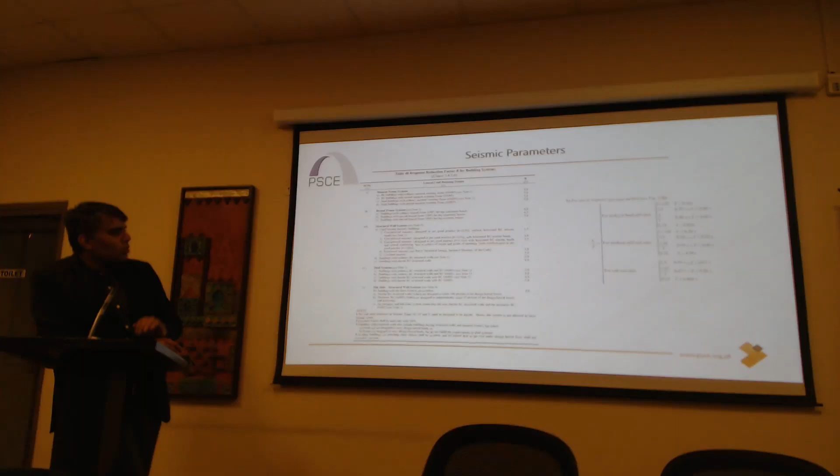And if you compare, these are the Indian provisions, by the way, that I've used. They have their own R value, and their own Sa over g values, which they might have calculated using PSHA or the deterministic seismic hazard analysis, DSHA. And this is how the two compare. This one is Amritsar, this one is Lahore.

So the Americans, and the arrogance is profound. The Americans are wrong, the Indians are wrong, but we are right. And who has done it? I actually, I don't know. I want to reserve my comment. Anyways, so this is Amritsar, this is Lahore. Everybody knows Amritsar is right across the border.

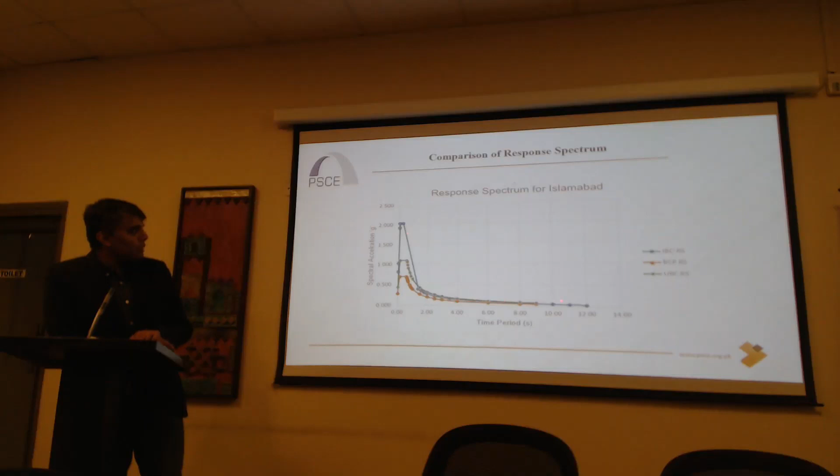Again, I think this is the International Building Code. This is how, for Islamabad, the response spectrum looks. The Building Code of Pakistan, this is how the response spectrum looks. We have successfully bluffed ourselves to serve the needs of the construction industry. And it has put so many lives in danger.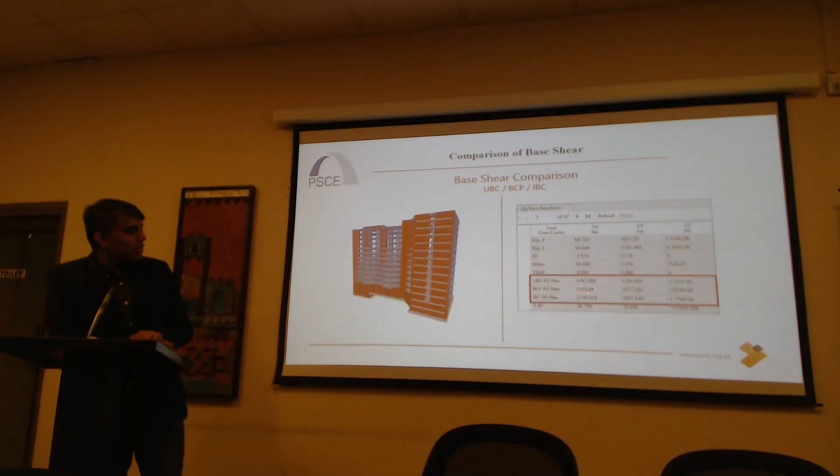Anyways, this is how the base shear compares. This is the IBC with the UBC parameters. This is the Building Code of Pakistan, 1123 versus 2730. This is for a building that my team was working on. And by the way, I have a stellar team. Okay. We think outside the box.

Again, I'll just skip through this, because basically what this slide is telling you is most of the engineers use ETABS, and they use the response spectrum analysis. And with ETABS and response spectrum analysis, they use it to calculate the story drifts. Well, understand one thing: when you're using response spectrum analysis, you lose the signs.

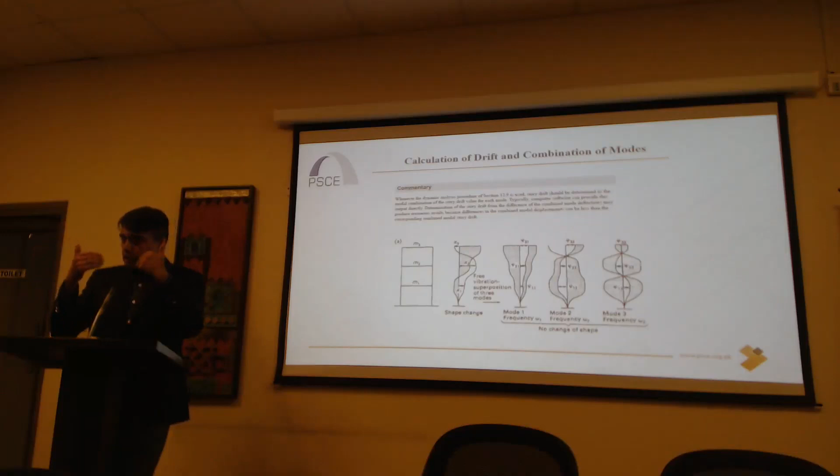So you need to be careful when you are calculating interstory drifts, because the different modes exist concurrently, and one mode will be doing this and the other mode will be going in the negative direction. And if you lose signs, then you are erroneously adding the absolute value of one mode to the absolute value of another mode.

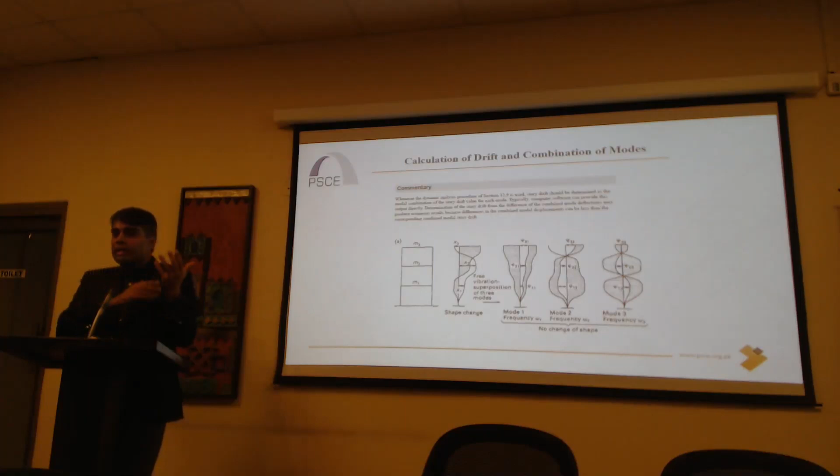How many of you have gone back and looked at ETABS and have searched as to whether ETABS actually combines modes and then adds the effect up, or ETABS is just calculating the absolute? Anyways,

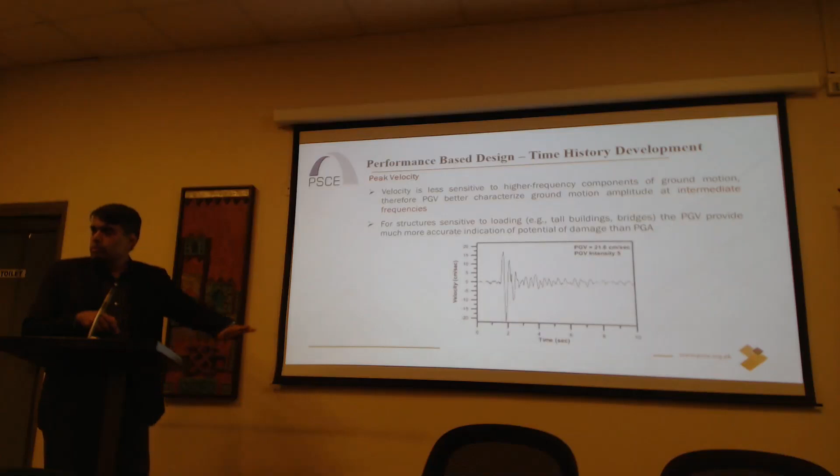Since I'm short of time, these are some ground motion measures. We have the PGA. Basically, I have the acceleration ground history, I pick the peak acceleration and I call it the PGA. Then I have the PGV. Basically, I can integrate this accelerogram, plot the variation of velocity of the ground, and pick the maximum value, and this is called PGV. And the PGD is basically integrate the velocity, calculate the displacement, and get the maximum value. This is called PGD.

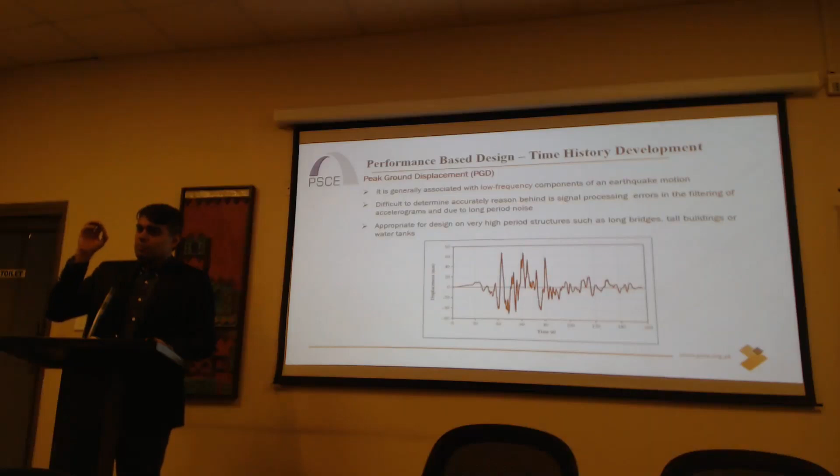And then if I use time history analysis, I discourage the use of response spectrum analysis, although my team is dragging its foot all the time, because response spectrum analysis is so easy. You just press one button and that's it, right? But anyways, all of these parameters are very important to know if you are conducting time history analysis.

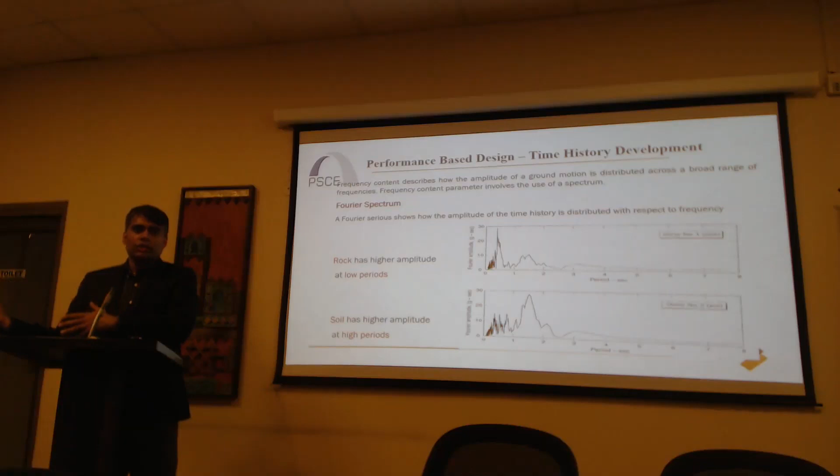The most important component of a time history analysis is its frequency content, and the frequency content is measured by Fourier spectrum. So you look at the accelerograms of different events, and you calculate the Fourier spectrum of each of those accelerograms. You compare the Fourier spectrum with the natural time period of your building. It's not as simple as that, but basically if the two match, then it's a good candidate for selection. So all of that, I'll skip.

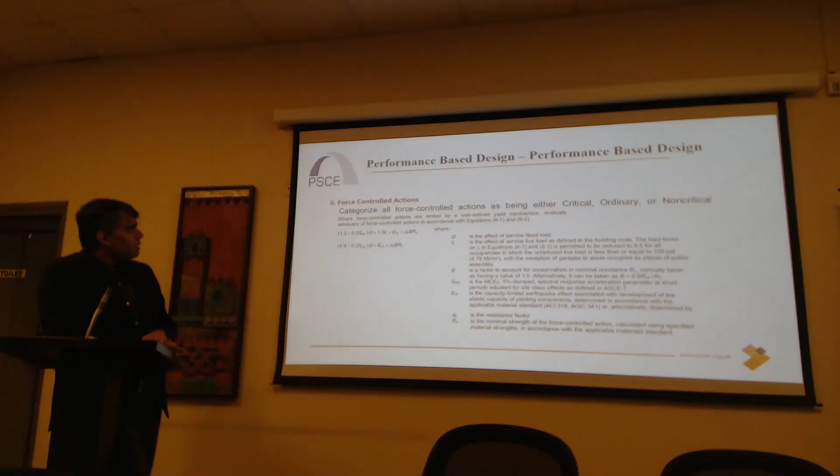I wanted to introduce a last thing here. I wanted to talk to you guys about performance-based engineering. You might have heard the word, but the crux of performance-based engineering is all codes are cookbooks. Forget the codes. What do I mean by that? Well, I mean no R values, no overstrength values, no Cd values, no rhos. Rho is basically the redundancy factor. You set all of them equal to 1.

Even no phi values, and use not nominal values of the materials, use the expected strengths of the material. For example, if you specify a nominal strength of 4000 psi, you know that most probably the actual strength of your concrete on average will be around 4300 psi. Use 4300 psi. All right. So you do away with all of the codes.

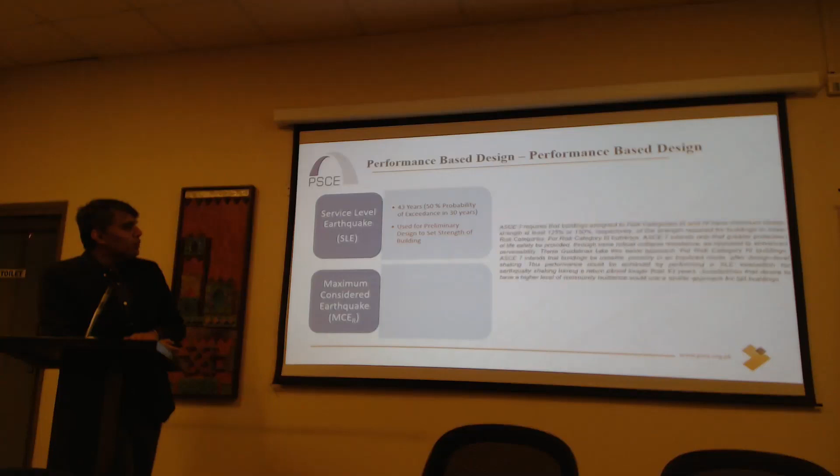You evaluate your structure at 2 levels: the SLE, which is the service level earthquake. Remember the 2/3 I told you about, the fudge factor? You do away with that also. The SLE is an earthquake that has 50% probability of exceedance in 30 years, or basically a return period of 43 years. This is the earthquake that your building is likely going to experience during its lifetime. No longer a fudge factor of 2/3.

This means that if your building is located in Islamabad, your SLE will be very near to your MCER level. If your building is located in Lahore, your SLE will be significantly less as compared to your MCER level. So it affects your design in this way. So you carry out a linear elastic analysis at this level, and then at this level, which I've written wrong, this is 2,475 years, 2% probability of exceedance in 50 years. This is just erroneously reproduced here, and you carry out the full nonlinear analysis here.

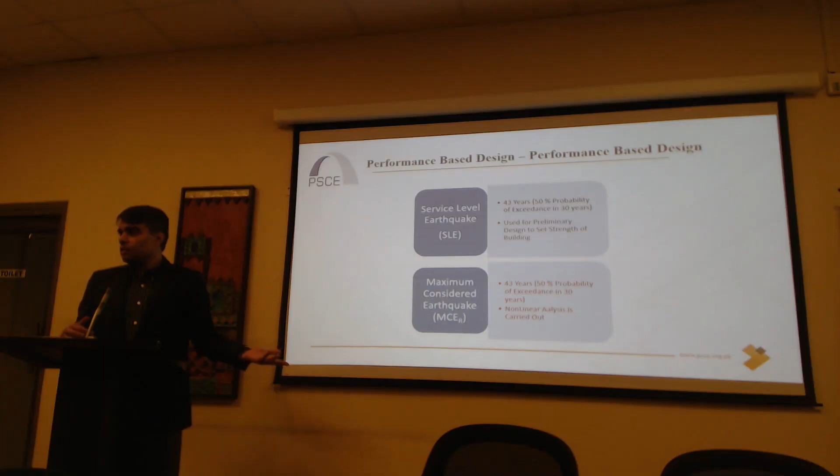What do I mean by nonlinear analysis? In ETABS, you have those nonlinear hinges, right? With increasing curvature, you can plot the M values, or you can use a fiber model. That is by far more realistic as compared to a linear elastic model. But that is the stage at which you are explicitly considering the reinforcement in your structural members. Otherwise, in the design practice that we follow in Pakistan, you are designing for reinforcement, yet you have never considered the effect of reinforcement ever in your computer models.

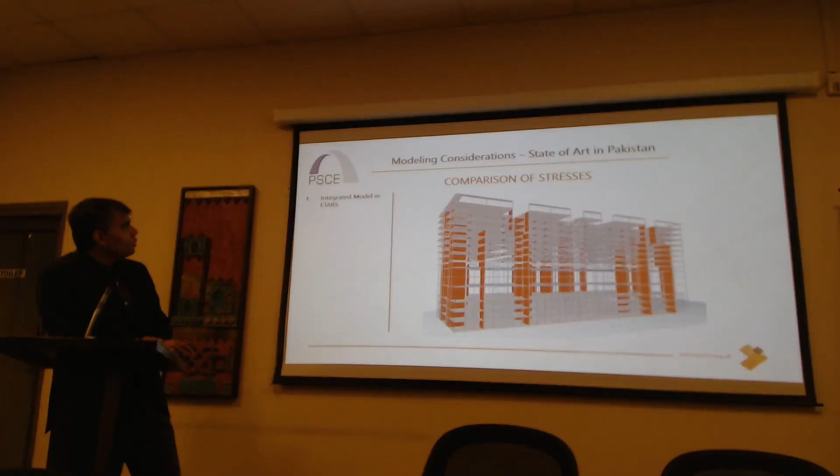All right, so let me end up with last comment. I'll not go through the performance-based approach. The common practice in Pakistan is develop an ETABS model, develop a separate SAFE model. Right? Wrong. Why? Well, let me show you a comparison of the stresses in your raft.